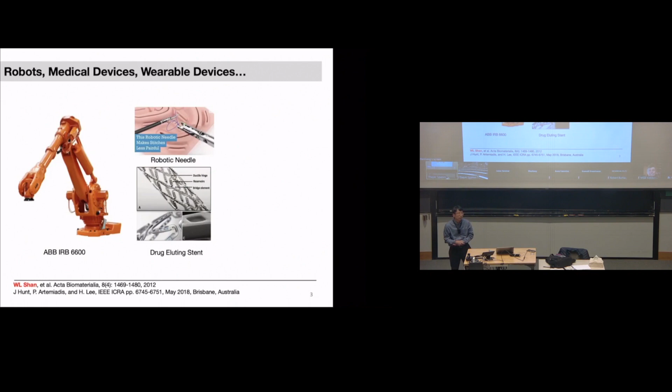Over the last 70 years or so, the field of robotics has grown into other periphery areas such as biomedical devices and wearable devices. Here I have a few examples, including this robotic needle for suturing applications, this drug-eluting implant for heart disease treatment, as well as this exoskeleton for human-machine assistance. We can see that from left to right, there is more and more machine-environment interaction involved, and most importantly, more and more human-machine interactions.

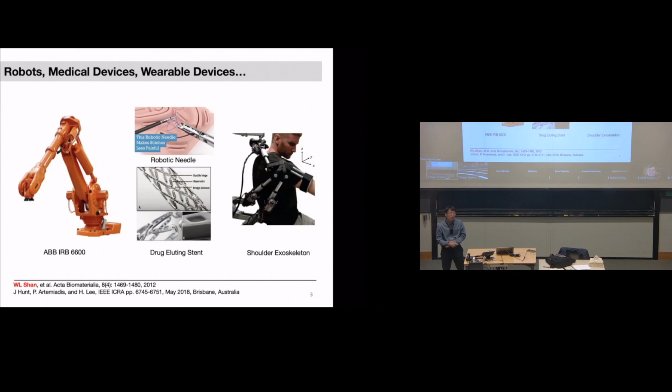This is a trend we were seeing. So human safety, human comfort, and environment adaptability is the key for robotic design right now.

Because of more and more human-machine-environment interactions, we've seen this surge of soft robotics research in the last decade or so. From left to right, I have three examples here. The first is a crawling robot made entirely of elastomers. This middle one is a soft gripper for food packaging by Soft Robotics Inc., a startup company coming out of Harvard, I believe. And here there's also a soft robotic glove for rehabilitation purposes.

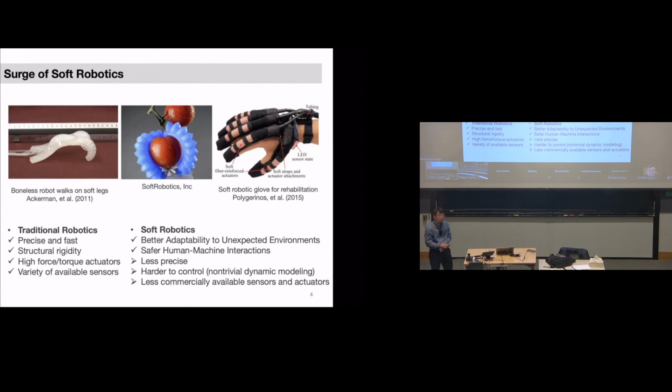Compared with traditional robotics, soft robotics has advantages such as better adaptability to unexpected environments and safer human-machine interactions, but coming with that are challenges such as being less precise, harder to control due to non-trivial dynamic modeling, and also fewer commercially available sensors and actuators. All these challenges mean opportunities for us as researchers.

If we look at traditional robots and our human body, we can see that the two use materials sitting at opposite ends of this modulus spectrum. Traditional robotics use hard materials—metals, silicon, and hard plastics—whereas our human body mostly consists of tissues and organs, mostly soft, squishy stuff.

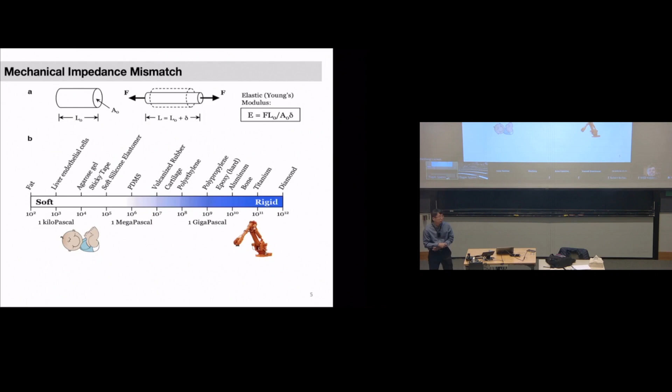But if we examine more carefully, our human body is not entirely soft—actually, we are hybrid. We also have rigid materials such as bones and cartilage, and also muscle, which can stiffen or relax depending on what kind of job we're trying to do. In a similar way, we expect smart materials with tunable stiffness that can be used in many soft robotics mechanisms to get the best of both worlds.

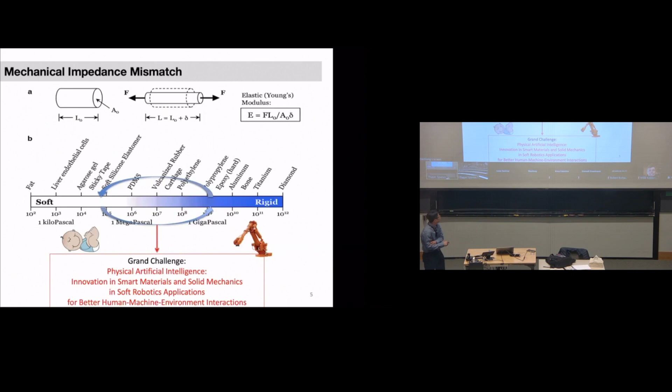When it's rigid, it's rigid. When it's soft, it's soft, and you can switch between the two to design robotic systems for better human-machine and environment interactions.

This is the research theme of my group. We are focused on smart, hybrid, active, and nature-inspired materials, mechanics, and machines. I want to integrate my background in materials engineering and solid mechanics to impact critical application domains such as

soft robotics, biomedical devices, and also wearable devices. Along this theme, over the years we have done many projects. Here I show this smart material product, which I don't have time to detail about today, but you see the structure there.

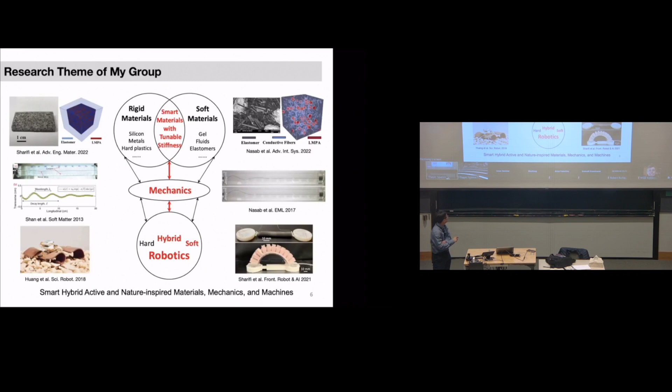We also look at wire buckling mechanics. This is for the design of robotic needles, potentially. And also more recently, we are looking at crawling robots. This one is based on shape memory alloy wires, and this one, more recent, is based on tunable friction.

Today, I'm actually not going to talk about those in detail, but instead focus on adhesion mechanics and soft grippers based on adhesion mechanics. With that, we've pretty much covered the background and motivation part. This is the outline of the talk.

Next, we're going to look at existing compliant gripping approaches. This includes existing approaches by other groups, and also one recent study by my group. We're going to comment on their common limitations, and then propose new approaches based on subsurface stiffness modulation.

We call it SSM, or subsurface pressure modulation, SPM. We're going to do outlook and future work for compliant manipulation after covering these two, and use an example such as shell adhesion mechanics to indicate what exactly we're going to do for the future on this topic. In the end, I'm going to conclude and provide acknowledgements.

Soft grippers, right? I showed a couple already, the one by Soft Robotics Inc. Here there are more examples. This first one is a multi-finger soft gripper, and each finger is made of a bilayer of elastomers with different stiffness.

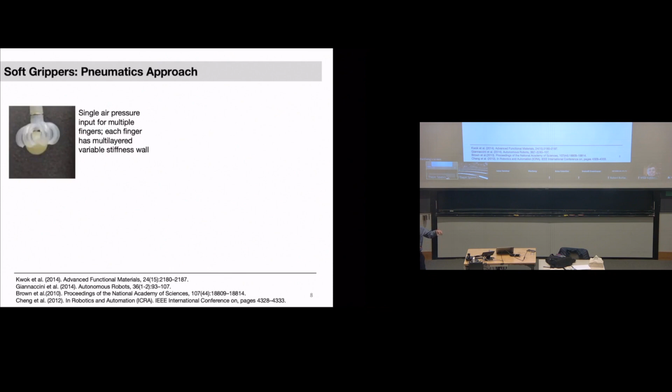And they have chambers that you can inflate. When that happens, the soft layer is going to extend more, and the rigid material will extend less, and you're going to generate this bending motion, and collectively with multiple fingers you can grasp objects. You can release when you remove the pressure.

This approach is an elephant-trunk-mimicking soft gripper. You can see that this one is based on incompressible liquids. Because they use the liquid, they can do more heavy-duty stuff. This is actually a piece of rock here being lifted by this elephant trunk mimic soft gripper.

There are also other approaches based on pneumatics. This one uses particle jamming, or granular jamming. This is actually a balloon, a rubber balloon, and they have ground coffee inside. When you don't take the air out of this balloon, this composite structure can adapt to whatever shape and try to pick up all sorts of objects.

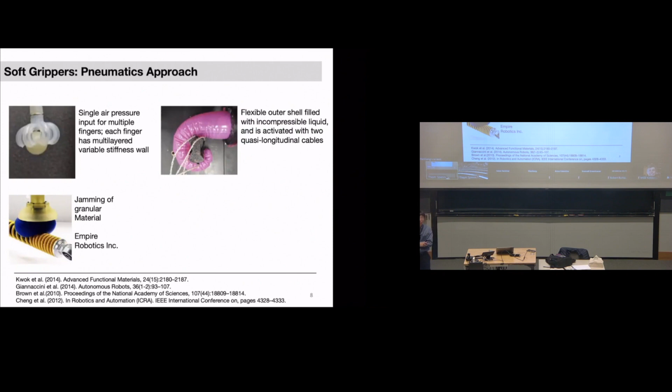Then you can take air out, the shape will be locked, and you can pick it up. Actually, there has been a company built, named Empire Robotics. They started back around 2013-2014, and they filed for bankruptcy due to a fatigue issue. It turns out there is fatigue when you try to do this grasping, and this thin layer of rubber balloon is not durable enough for pick-and-place operation in a factory setting.

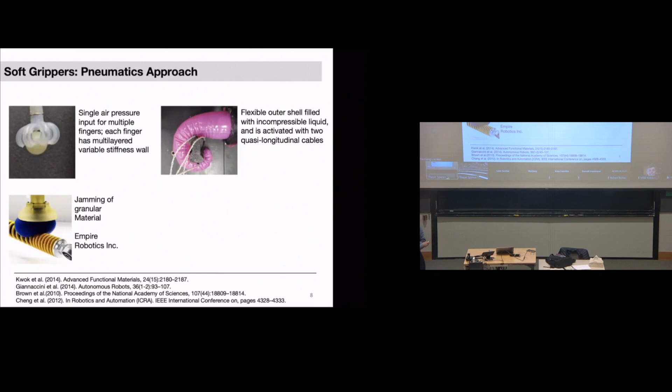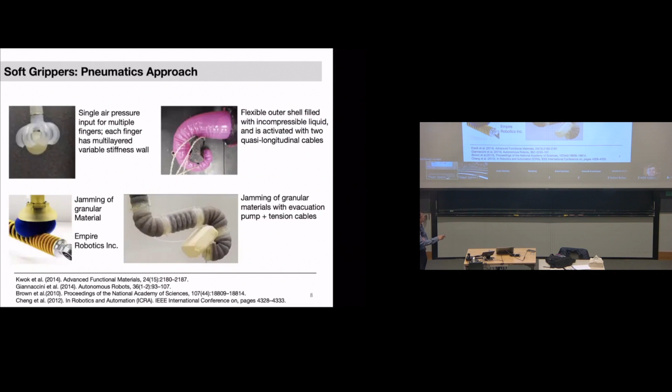The last example here actually combines multiple approaches with particle jamming and also an evacuation pump, etc., such that they can do multiple bends in the structure. These are based on the pneumatic approach.

There's another approach called electro-adhesion. I have a recent study back in 2016, 7 years ago. This is a two-finger soft gripper, with each finger being a multi-layer structure. You have a middle layer pre-stretched during fabrication, and you can adapt.

Then you can attach another two layers on the top and on the bottom. Because of the initial stretch, when you release the structure, the finger will naturally be in this curled geometry. When you apply high voltage, like 3,500 volts, this curled geometry will straighten again because of the strong electric field across this thin film, which is a dielectric elastomer.

So they can stretch and you can get close to objects and pick them up. They have shown this gripper can pick up things like an envelope—a very thin object—or 3D printed parts with a cylindrical shape, or even a peeled fruit here. They can do all sorts of things.

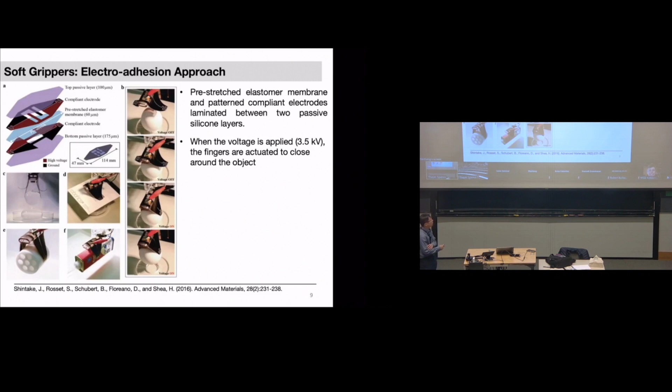The drawback I would see is they need high voltage, like 3,500 volts, to do this, and they tend to have trouble when the environment is humid.

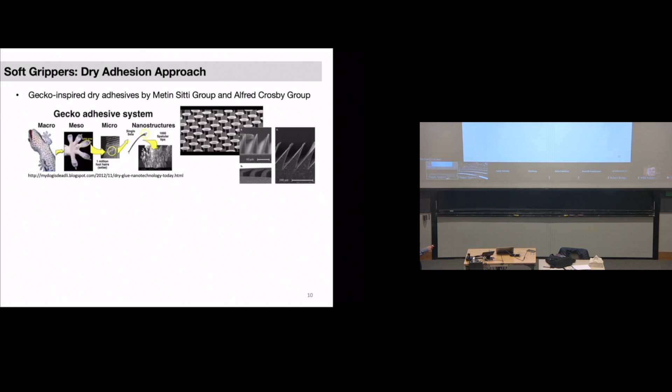Yet another approach is based on dry adhesion. The main source of inspiration comes from the gecko. Over the last few decades, researchers have really come to understand how gecko adhesion works. Their feet have multi-hierarchical structures, all the way from nanoscale to macro scale. Professor Metin Sitti's group at Max Planck Institute, and Professor Alfred Crosby's group not far from here at UMass, have been doing a lot of work on these topics, and they were able to show directional adhesion based on gecko-inspired approaches.

My colleague Kevin Turner at Penn took a slightly different approach. They argue that if you start with an otherwise homogeneous elastomer pillar and insert a rigid core inside this pillar, you can enhance the dry adhesion. They did experiments showing the thickness T between the bottom of this rigid layer and the interface. When you keep R constant and reduce T, moving from right to left in this plot, the dry adhesion goes up, with a maximum switch from edge crack to center crack right at a critical value.

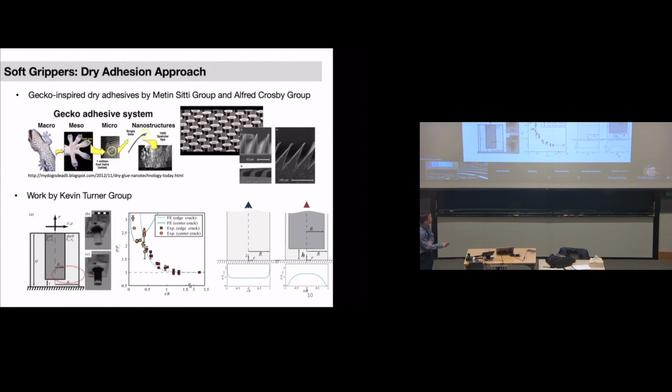They show that the reason for that switch is the stress distribution manipulation. With a homogeneous elastomer pillar, there's stress concentration right at the edge. When you insert a rigid core, however, this singularity at the edge is suppressed, and the stress becomes much higher in the central region. As you push the thickness thinner and thinner, this central region becomes dominant, so instead of an edge crack you get a center crack when T is small enough. This is predicted both by finite element simulation and by experiments.

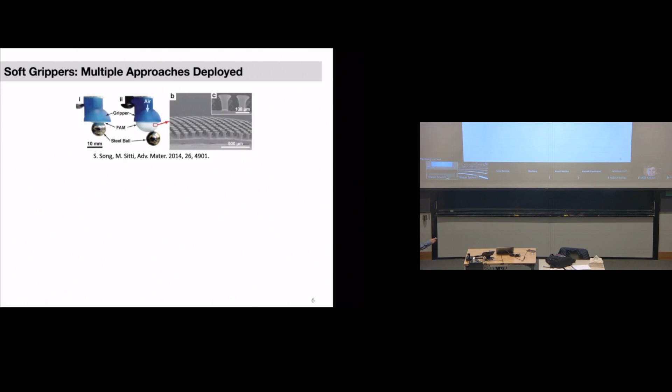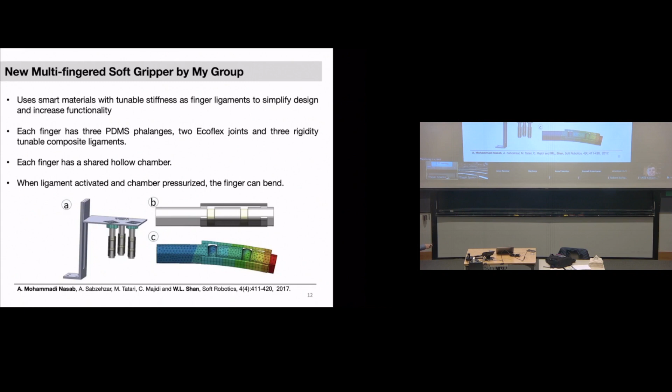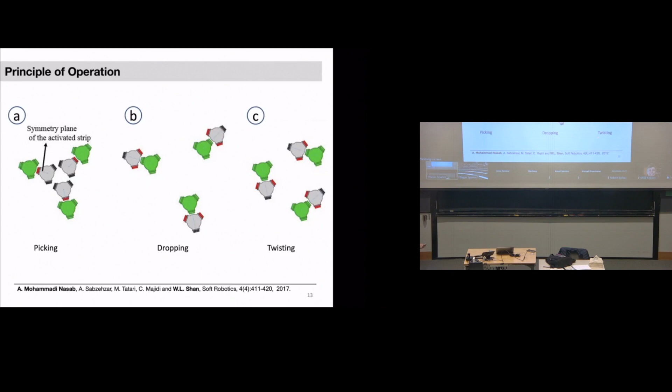My group also did something along a similar line. We proposed a multi-finger soft gripper, using smart materials with tunable stiffness, like artificial muscle, on the side of the wall as ligaments. Each finger has 3 ligaments made of smart material, plus 3 phalanges and 2 joints, with softer joints. In the middle there's a chamber you can inflate so that when you activate the ligaments, selectively activating them, you get a bending moment. Selectively activating one set of ligaments across the 3 fingers generates a closing motion, or you can activate the opposite set for an opening manipulation, allowing dropping of objects. Combining both sets generates twisting, which hadn't been demonstrated for a long time, since back in the 90s.

For the smart material, we use CPBE, or conductive propylene-based elastomer. We start with a copolymer elastomer based on polypropylene, then add structural carbon black into it. We can laminate this pellet form into thin films, then use laser patterning to get whatever shape we want. Here is a demonstration that we can activate this U-shaped strip by running current through it, and here are the activation results.

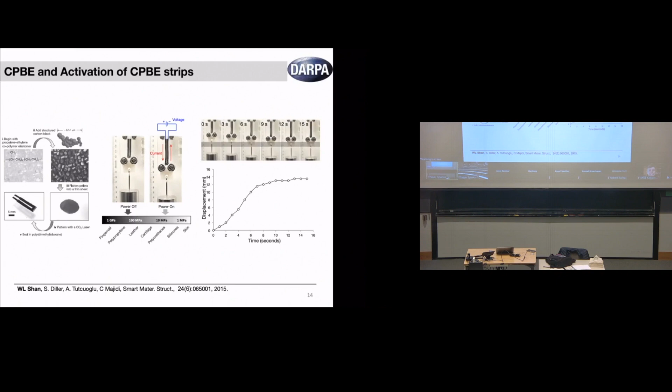You can see that actually within roughly 10 seconds, we are able to soften the material completely using tens of volts.

Now back to these ligaments. Using these smart material ligaments in the soft gripper, we demonstrate manipulation of all sorts of objects: here is a ping pong ball, a glass ball, and a paper packet. And here, notably, we are grasping this petri dish from inside using the open mode.

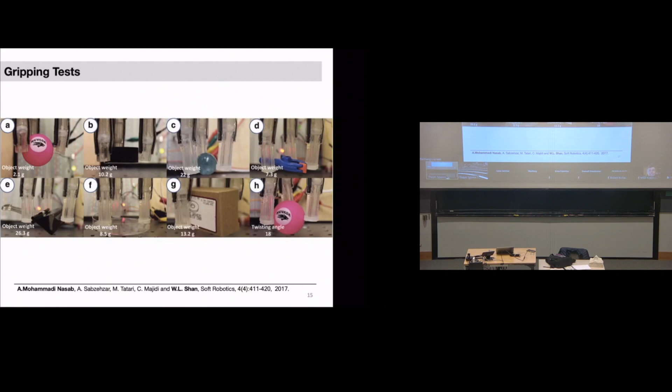This last H here is the twisting mode. I have a video showing the process of picking up this ping pong ball and also twisting it. Note that right now it's real time. You can see we are activating this thing, then with bending, we're closing on the ping pong ball, and we can pick it up.

Next, we activate another set of ligaments, and we're able to generate a twisting motion out of it. This is sped up 4 times because the material we're using isn't that conductive, and there are other issues. We have efforts improving on this, as shown earlier in the figures, but I don't have time to detail this today.

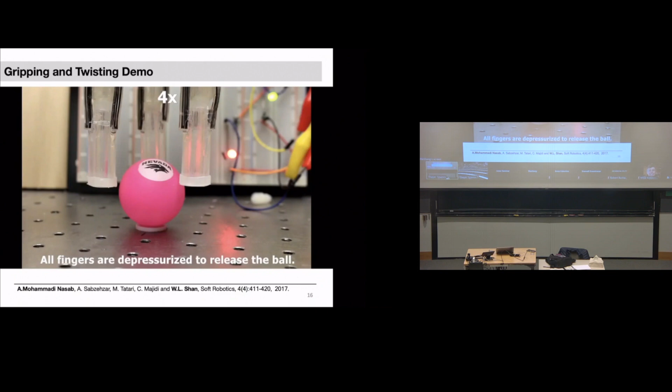So those are good, but we identify common drawbacks across this approach, including my own work. Multi-finger grippers are good at manipulating objects smaller than their opening sizes, but they typically suffer at manipulating thin, flat, and small objects. If you design a big gripper, it's hard to pick small things, and multi-finger grippers have a hard time picking up, say, a credit card from the table.

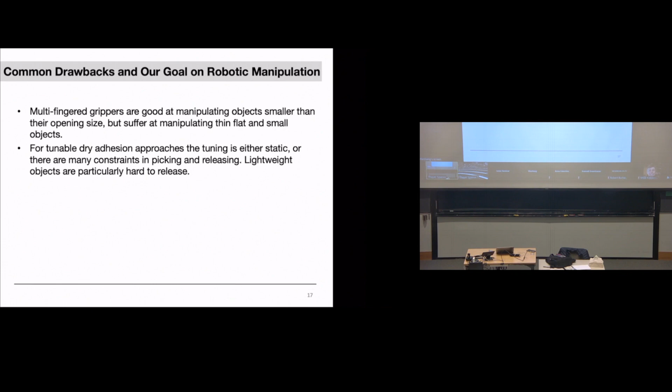For the tunable adhesion approach, the tuning is either static, as in my colleague's work at Penn, or there are many constraints in picking and releasing. Lightweight objects are particularly hard to release. Sometimes you can pick it up, but you cannot release it.

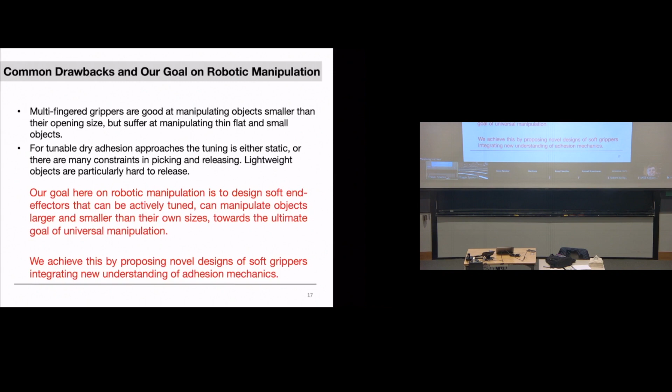So our goal in robotic manipulation is to design soft end effectors that can be actively tuned, that can manipulate objects larger and smaller than their opening sizes, towards the ultimate goal of universal manipulation. We achieve this by proposing novel designs of soft grippers, integrating new understanding of adhesion mechanics.

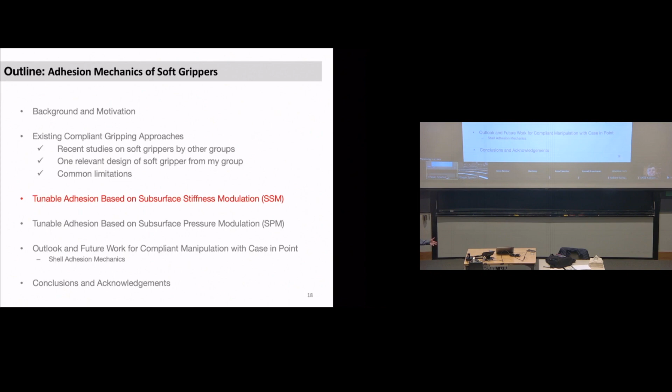Next, we look at the first example using this subsurface stiffness modulation approach to achieve tunable adhesion for manipulation. This is based on previous work by my colleague. We look at this structure: you insert a rigid core and get enhanced dry adhesion. But that's it—you cannot change it within a second. Once you fabricate the structure, adhesion increases, but you cannot decrease it anymore.

But what about using soft material as the core instead of a rigid material that cannot respond to anything? We can have the material initially rigid, so you have high adhesion at the beginning—you can pick up objects and manipulate them—and then when you want to release, you turn the switch, soften the material, and within a couple seconds the object will be released. That would be useful.

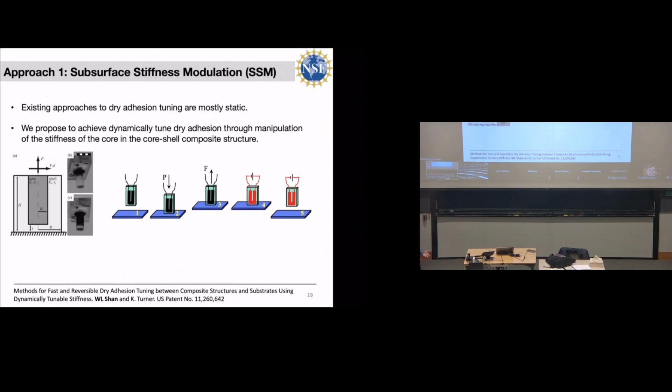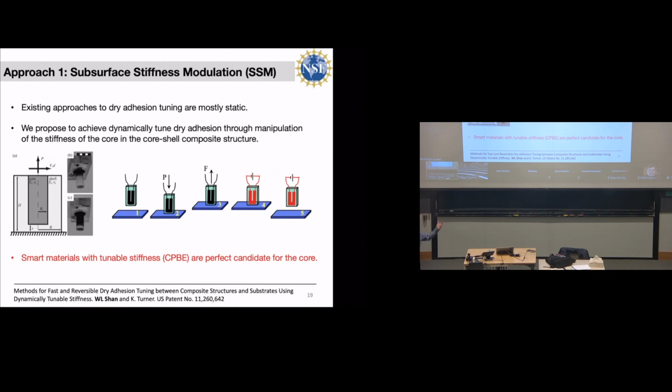The material I mentioned earlier, CPBE, conductive propylene-based elastomer, is a perfect candidate for the core. For demonstration purposes, we went on to illustrate this. Essentially, we are trying to switch between two states: when the material is softened, you have a soft post; when it's not softened, you have a rigid core. So you can switch between the two by activating the core or not.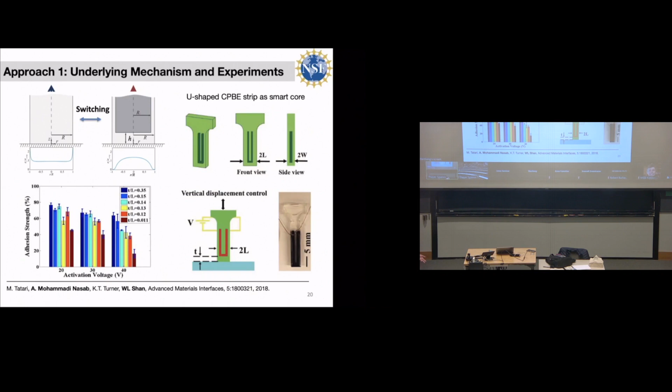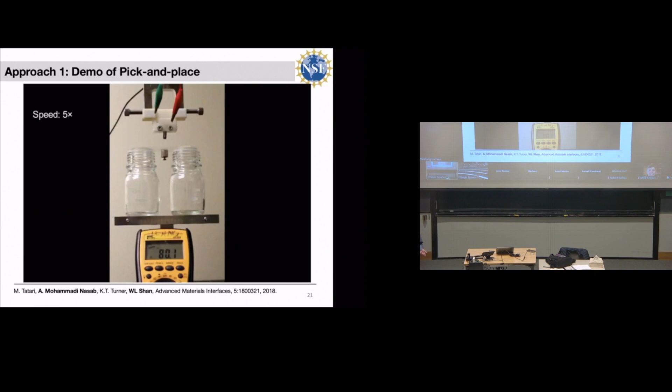That's good, but then we ask the question: when we use the material or core, most of the material is not contributing, right? You have this big U-shaped core here, but we know everything is happening on the interface. So why don't we modify the design such that we only keep the material close to the interface? That way, supposedly, we don't have to wait 5 seconds, and we don't need tens of volts, if you have another material that's more conductive.

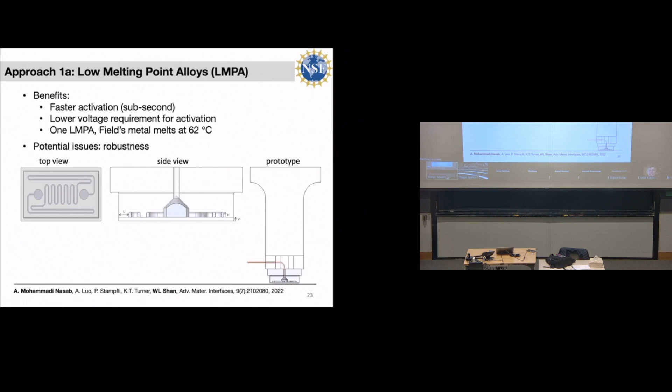We went on to implement this idea. We're actually using this low melting point alloy. Because it's highly conductive, we need to create enough resistance, so we use the same layer, and within this layer we make patterns to ensure the channels are long enough to have tangible resistance. There are also other advantages, but there are potential issues too, because this material can melt later during activation, which can be troublesome sometimes. There's a robustness issue, but anyway, we went on to implement the idea.

Here's a video showing that this indeed works. We're trying to pick up an aluminum disc here with a glass attached on top. You can see that we can pick it up - this roughly 1 pound aluminum disc - and release it on demand within 1 second using 5 volts. This is a huge improvement compared with the previous design.

What I didn't show you is that the adhesion tuning here is actually not as good as before - roughly 2 times compared with 6 times earlier. The reason, we realized after a careful mechanics analysis, is that the backing layer is actually useful, not completely useless. The thickness or height of that backing layer is critical to make sure you get enough tunability, while also reducing the material that's not contributing. That's very good, and we are happy with that.

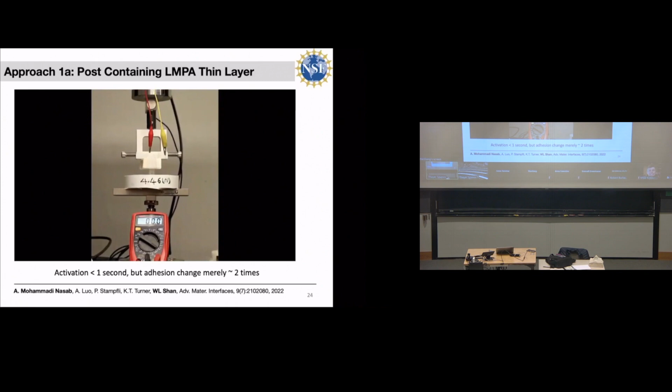So the next approach I'm going to talk about is based on subsurface pressure modulation. We demonstrate this subsurface stiffness modulation. We understand that the reason we have tunable adhesion is that we switch material between soft state and rigid state to change the stress distribution on the interface. So we asked: why can't we use pressure to change the stress distribution on the interface? We went on to implement the idea.

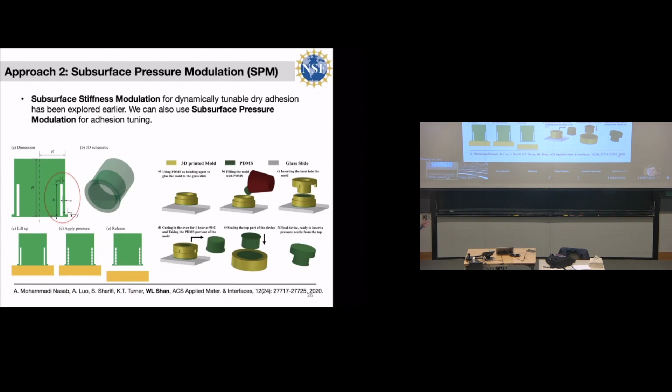Here is some fabrication, which I'm going to skip the detail about - I think you guys are probably all very familiar with this. This is 3D printing, molding and casting, etc. I'm going to skip that.

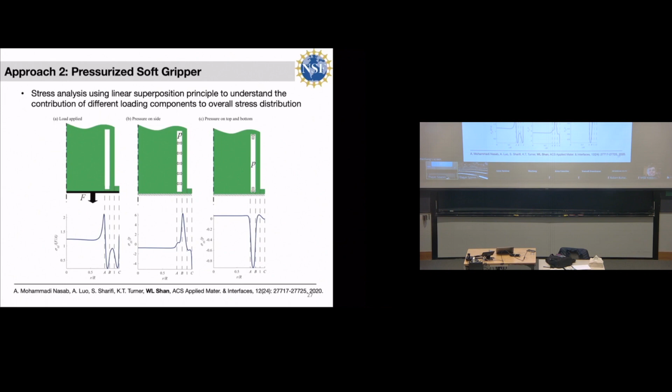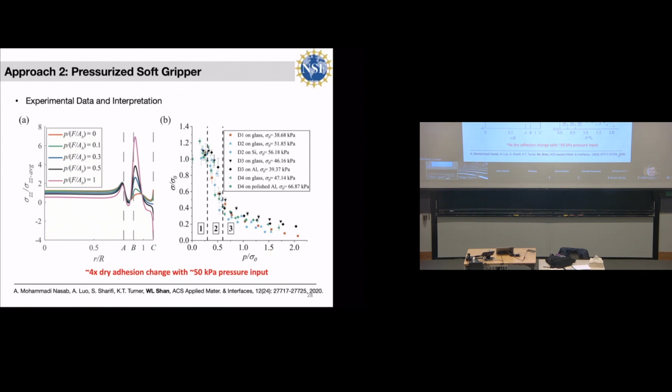That's good, compared with suction cups, right? We typically use like 100 kilopascal there. You create a vacuum there.

From this previous analysis, we realized the major event is actually bending of the sidewall of the soft hollow chamber. Then we ask the question, why not get simpler and just use directly soft hollow pillars? Early on we had the middle post there, and an annulus chamber. Why don't we just have a hollow chamber with some sidewall, and that's it?

In this case, supposedly we can inflate the structure or deflate the structure. We can change the stress distribution here, and we can release objects on demand.

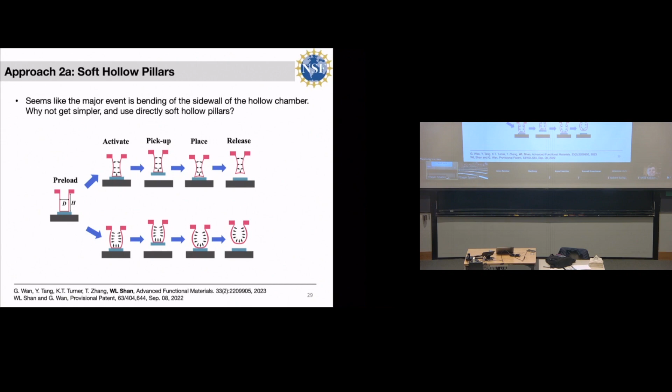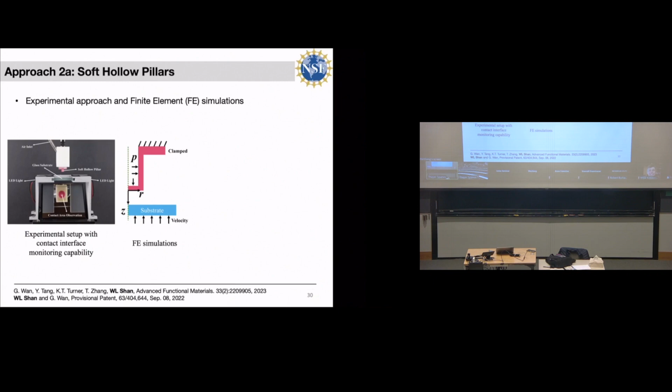When we implement the idea and did experiments, we monitored the surface contact, the interface contact evolution during the process. We were able to show that using positive pressure and negative pressure, we can both get this initial increase and a sharp drop in the adhesion strength of the device.

This time is much better than before. Early on, we had 50 kilopascal input, and we were getting 4 times dry adhesion change.

This time we're looking at 15 kilopascal in the positive case, and also minus 8 kilopascal in the negative pressure case. We can almost bring down this adhesion strength to 0. We're getting tens, or even 100 times adhesion change using even lower pressure. This is a much better design than before.

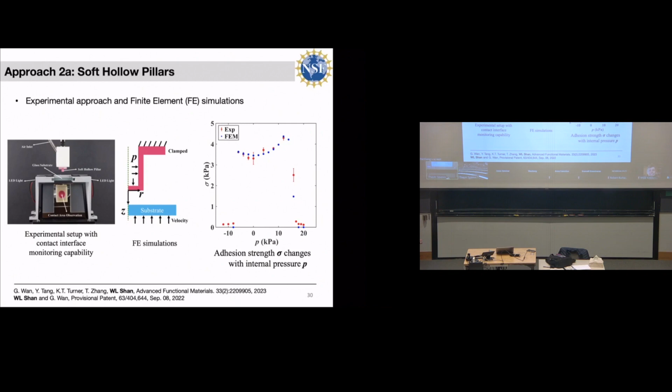Here we're carefully looking at the reason why we're getting this increased or decreased adhesion. We look at the positive pressure case, and the stress distribution along the interface. We can see that when you gradually increase the pressure, there will be a bump coming up here, which explains why we're seeing some internal failure here instead of right from the edge.

When you go to 18 kilopascal, even from the finite element simulation, you see the crack initiate in some region close to the edge, but not on the edge. That's because here you have a bump, you have the highest stress here, and that's why failure initiates from there.

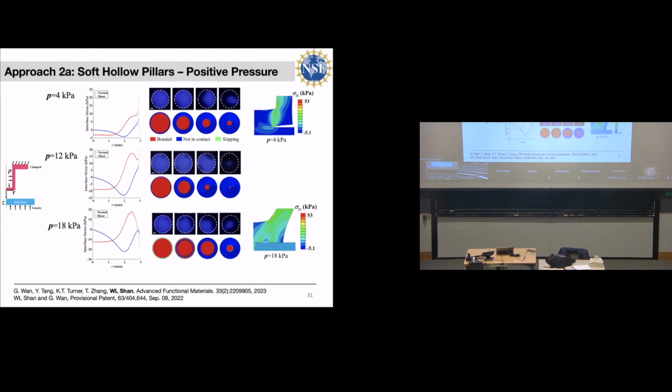The negative pressure case is even more interesting. When you do minus 4, you don't see much happening. Actually, the adhesion goes up a little bit.

If you go to minus 8, you can see the sidewall of the soft hollow pillar buckles. This dramatically changed the strain and the stress on the interface, and makes this tunable adhesion even more dramatic. We were able to simulate this whole process using finite element simulation, but also track the surface contact evolution using the camera system we built up earlier.

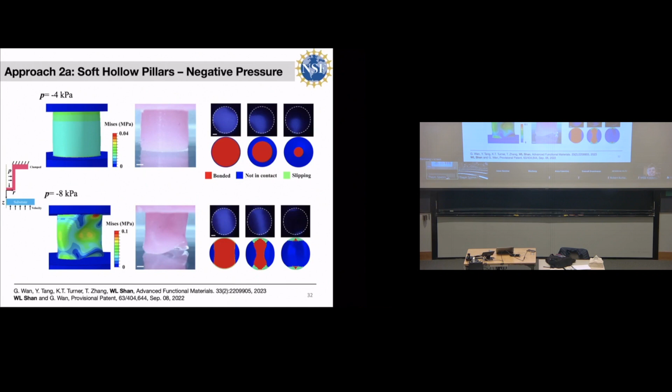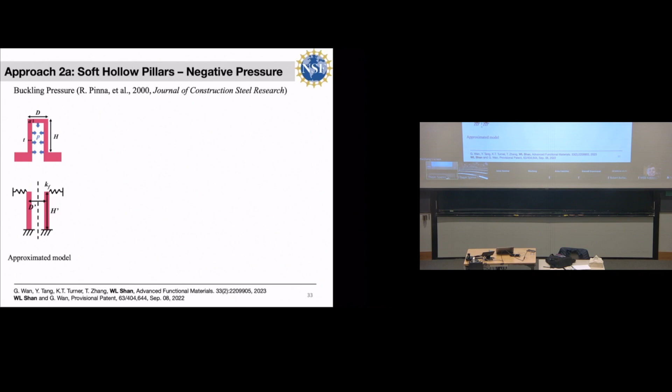We also did some theoretical analysis to try to understand what is going on, what governs the mechanics of this. We see we can treat this as a bonded shell structure, and depending on the geometry and the material property, we can design this Z parameter here.

If you calculate this dimensionless number, you can decide whether the soft pillar is going to buckle in what we call mode 2 buckling, or mode 3 buckling. Mode 2, you have two opposite surfaces buckling toward each other, whereas mode 3, you have three buckling surfaces, 120 degrees apart.

We are able to show that this analysis is clear: when we have this parameter, it's going to do mode 2, and when we have this other parameter, we're going to do mode 3.

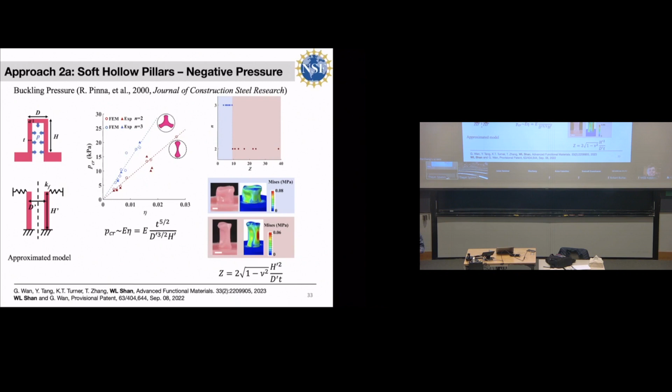Mode 2 and mode 3 are important because the corresponding critical pressure will be determined by that. And we care about the pressure because we want to keep it low such that it can consume less energy. It can also respond faster.

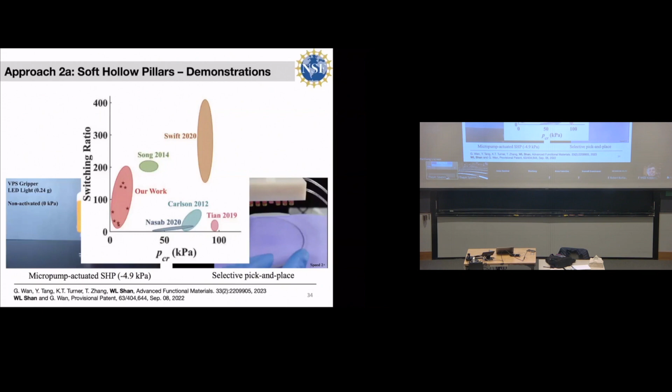So here I have some videos to show that you can use a micro pump. This is untethered. A micro pump, and this hand can actually be replaced with a robotic arm. Then you can pick up this LED light there. You can also fabricate this array of soft pillars and pick up an array of objects selectively.

With this one, we're showing that we can do this SU pattern. You can pick up those things and then deposit them, and you can see this SU pattern here. This is real time, by the way, and now because we have low pressure, we're talking about on the order of milliseconds, 100 milliseconds.

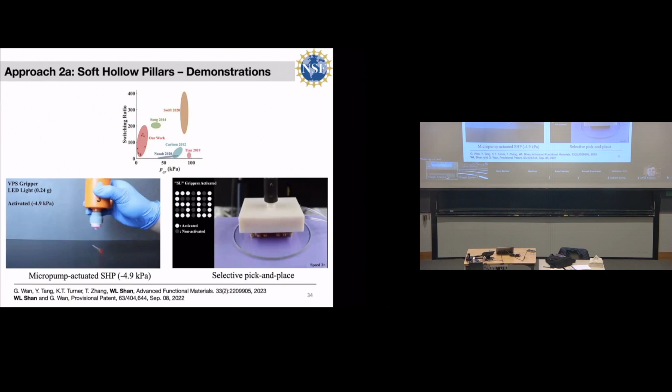That's good, I'm going to move to the next slide. I believe I have a better demo actually. Here, my student tried to pack everything into a pen-like device.

This is literally a pen-like device, and we have this controller here. You can turn it, there's a micro pump, and you have a battery here. You can have your soft pillar here. And we demonstrate that we can pick up and manipulate this microelectronics part provided by a company we're working together with, and then release it very quickly.

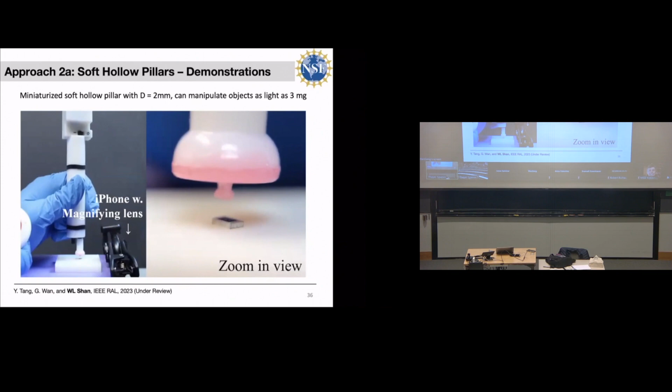The next will be a video about this. This video is really short, it's real time, so this is concurrent, simultaneous pickup. I'm going to do it again because it's really short. You can see we press the button here, it immediately drops. This is real time, we're not speeding up, and we calculate the time to be 120 milliseconds. This is ready to be adopted in industry, I would say, in terms of response time.

Think about all those manipulations, repetitive manipulations. But there are also other issues I'm going to talk about later - what's the distance, what's the gap between being adopted right now and the version we have right now.

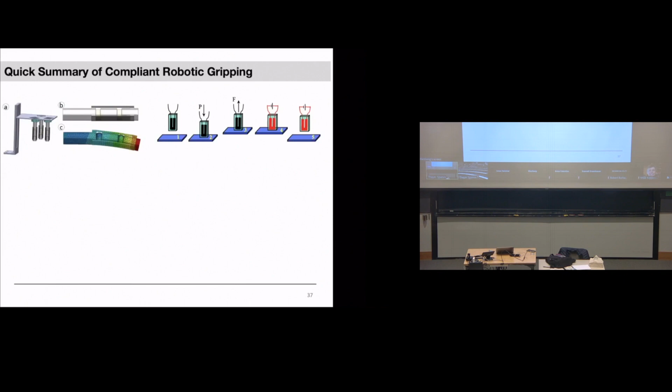With that, I'm going to do a quick summary of compliant robotic gripping that I've covered so far. My group has been working on this multi-finger soft gripper that can do picking up, release, and also twisting. We also looked at this tunable adhesion-based soft gripper that can do pick and place operations using smart materials. We also have a variant version of this - instead of this big U-shaped core, we have a thin layer. We demonstrate some performance metrics have improved, whereas others suffer a little bit.

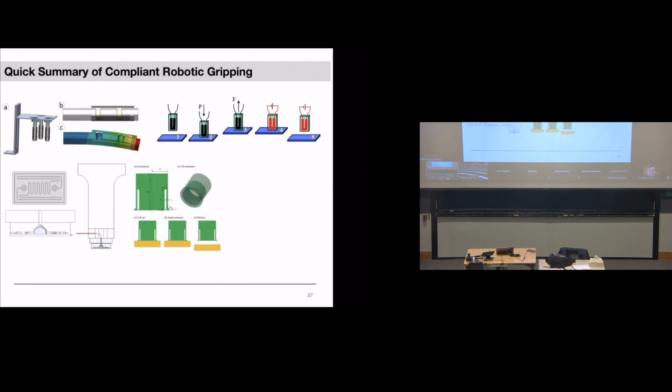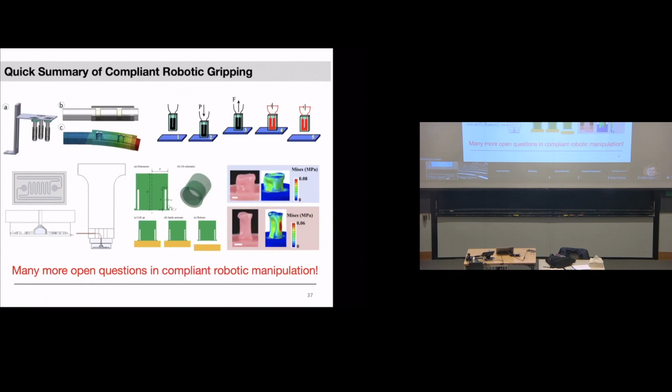And this one is a pneumatics-based approach, and we have a better approach when we use this completely soft, completely hollow pillar - we're able to do this work. We are excited for this work, and we are proud of it, but we want to see that there are many more open questions in compliant robotic manipulation.

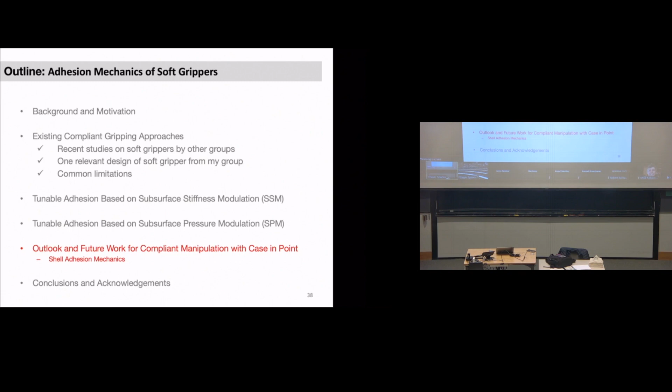So next, I'm going to look at and talk about the outlook and future work for compliant manipulation, with an example about shell adhesion mechanics.

So this is the first one, this is the fundamental mechanics thing. We're actually trying to look at the soft hollow pillar structure and ask the question, how can we further improve its performance? What's, for example, the cap effect? For those gecko-inspired dry adhesives, they have micropillars with caps, and those can significantly increase the adhesion strength. Here we wonder, if we add a cap, what's going to happen? It's going to increase the adhesion strength, but what's its effect on the tunability?

We also look at the potential for the bottom surface, if I have a bistable structure, what does that mean for the tunability and for pressure needed, etc. These are actually proposed in my NSF career proposal, which hopefully will come through in a couple of weeks.

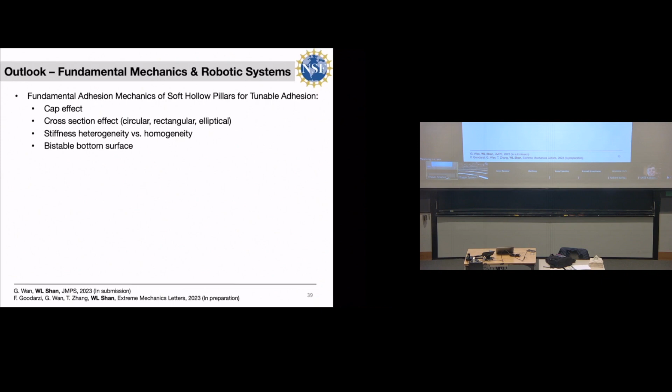I also try to, we have been working on this NRI grant, integrate both the SSM approach and also SPM approach to existing robotic grippers for universal gripping. Our collaborators at CMU and also Penn were able to do some demonstrations.

Another thing is application in space. Space is a very unique environment because it features microgravity and extreme temperature swings. There's also no air. This subsurface stiffness modulation will be perfectly matched for this application. The pressure modulation will suffer a little bit because you cannot create negative pressure there inside subsurface, because there's no air. Outside is empty, there's nothing.

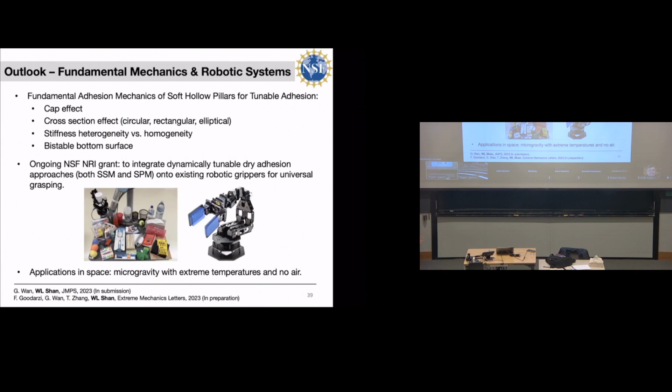But you can indeed send a pulse of pressure to the chamber using a gas tank. So the SPM approach will work half of the mechanism, I would say, but it can work all the time, based on only half of the spectrum of the thing we have talked about earlier. I'm trying to explore that in a NASA proposal.

And then also for this ICorps project I did earlier, I mentioned, back in 2018 I was visiting Silicon Valley and other startup companies. So we have been trying to learn from companies to find out what exactly is the technical pain point they're experiencing in terms of manipulation.

The lesson I learned after doing over 100 customer interviews is that actually automotive companies, for example in the Detroit area, are shifting away from compressed air and vacuum cups due to energy cost considerations. The compressed air we have in the lab is not free, and they have to keep it on all the time. It's some bill they have to pay regularly. So they want to shift away from that.

Also, small, delicate, and curved objects have always been challenging to manipulate for all industries. I demonstrated manipulation of flat and thin objects. We can do this LED light, which has some curvature, but we have not gotten to the stage where we are very comfortable with curved objects. We are working on that, but we are not there yet. So these are for future work.

So some good points I want to highlight here are that both the SSM approach and the SPM approach consume much less energy, as energy is needed only for releasing. The device actually starts with a high adhesion state, which lets you pick up objects and do manipulation with a robotic arm. Only when you want to release, you either turn the switch to run current through it, or turn the switch to let the pneumatics go through. So you can save a lot of energy in that regard.

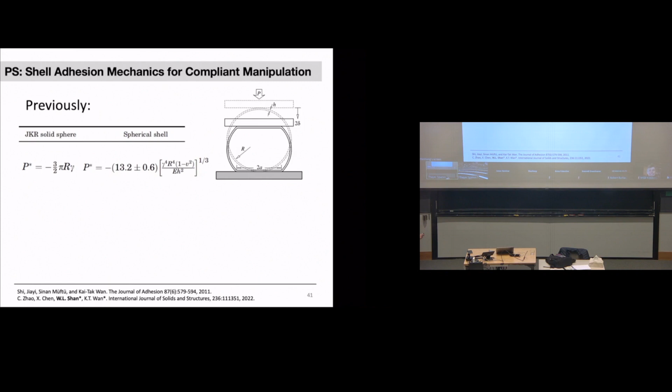You just have the surface energy of the material, and then you have pi, r, those are geometry, right? You don't have modulus, you don't have thickness there. So this literally says that as you get thinner, you're going to get higher adhesion. But no one has done experiments to validate this work.

We imagine that this spherical shell can potentially be used for compliant manipulation, for example manipulation of biological samples at a smaller scale, like a single cell, which also has curvature. You can put a very small thin shell there to pick it up, and hopefully use pressure or some other mechanism to release it.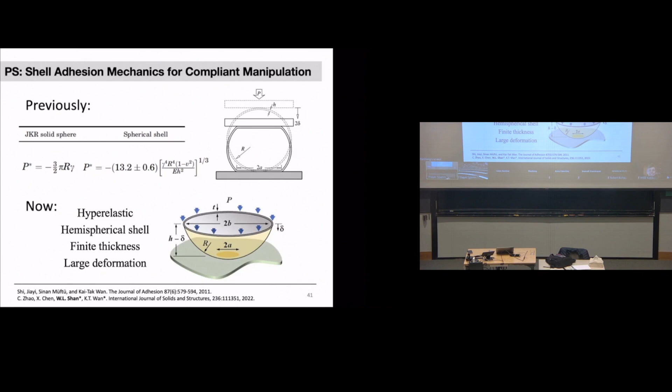So we want to understand this mechanics, and we're working on a hyperelastic hemispherical shell with finite thickness, not very thin, but finite thickness, and involving large deformation. Without going into too much detail, these are the experiments we're trying to do.

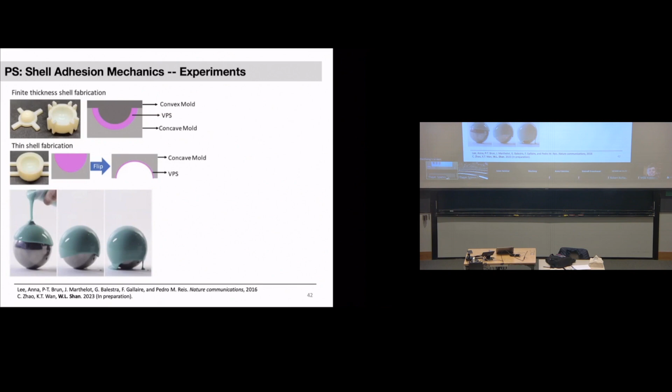We have 3D printed molds. We're trying to pour this uncured PDMS, and it turns out that if you pour uncured PDMS, eventually there will only be a thin layer left on this sphere. You're able to make these thin shells with elegant accuracy, actually.

With that, I'm going to conclude. I introduced this interdisciplinary research theme in smart, hybrid, active, and nature-inspired materials, mechanics, and machines for my group, and we do this for better human-machine-environment interactions.

We also look at compliant robotic manipulation approaches, integrating smart materials and solid mechanics. These include the multi-finger soft gripper, pressure modulation, and stiffness modulation for tunable adhesion. We also look at the outlook and future work for robotic manipulation.

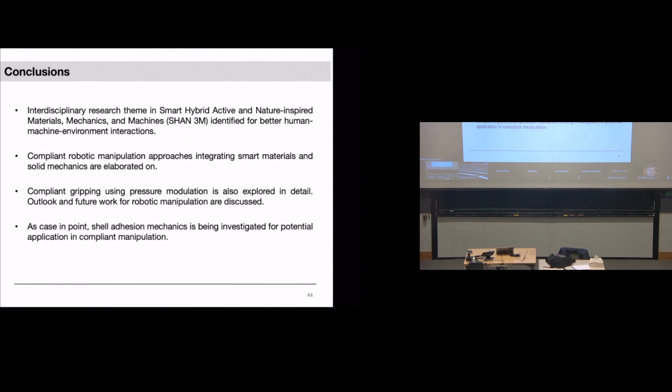As a case in point, we look at shell adhesion mechanics, and this is currently ongoing research for potential application in compliant manipulation. Once again, I want to revisit this: it seems like we do a lot of things, but actually we focus on materials with tunable stiffness, and we focus on relevant mechanics when we try to design all sorts of robotic mechanisms. I hope I've convinced you that we're doing that through the projects detailed today.

Another one is my postdoc advisor, Carmel Majidi at CMU. He's one of the collaborators on this NRI grant together, and he also literally brought me into this area of soft robotics. Also, K.T. Wan, as I mentioned, for the shell adhesion work, and Professor Teng Zhang for the soft pillar work I presented earlier.

Last but not least, the funding source. I've been very lucky to have NSF support on the projects I presented, but I also want to recognize the University of Nevada, Reno, and Syracuse University for the support of my work. I also want to acknowledge the industrial partners, including CASE, as I mentioned earlier, and also 3M. Right now I'm sending a PhD student to do an internship at 3M.